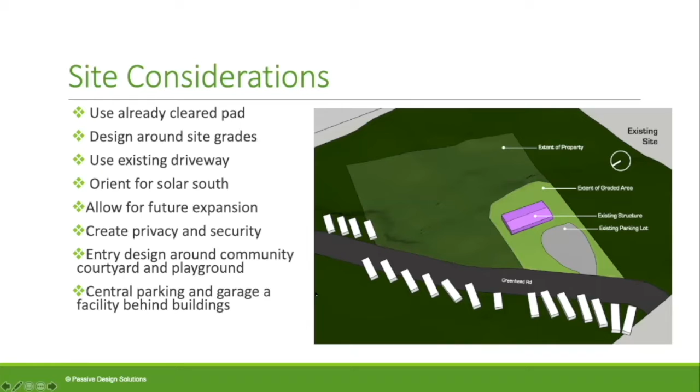We want to make it cheap to build, and we started that really early in the process. We had a really cooperative structural engineer who really gets what we're working to do. One of the things we did right off was reduce the frost wall, or stem wall as you'd call it in the States, from 8-inch thickness down to 6, reducing the concrete requirements for the walls by 25%, which also results in less embodied energy.

We designed the building with bearing on the roofs front to back so that we could eliminate the bearing under the demising walls between units. We were able to just use a ladder of steel within the slab itself, and expansion cuts, without having to put another frost wall under these demising walls. This gives us less thermal bridging, again, less concrete and less cost.

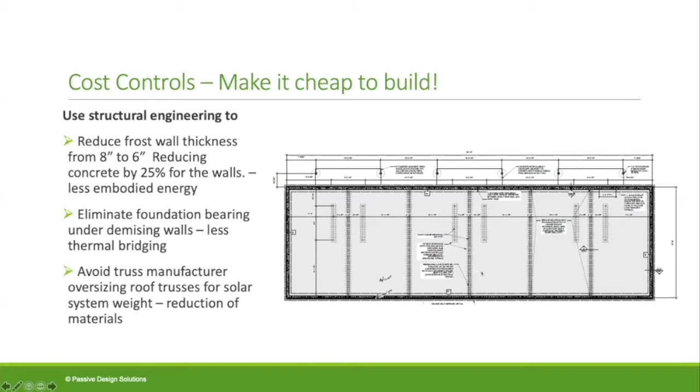I don't know what everybody else is experiencing, but we're finding that truss manufacturers, if they do the engineering on a project that says engineer the trusses for a solar system, completely oversize the roof trusses, which adds to the cost of the truss package. So we had our structural engineer do that sizing to avoid that tendency of the manufacturers to just oversize everything.

I mentioned we designed the roof front to back using a gable, so we're reducing siding quantities compared to using shed roofs. We are using a valley set to create this perpendicular gable, and this is actually south, so the gable roof works well for our orientation for solar panels. It's designed that they're going to construct the roof structure on the ground and crane it into place to help control the cost and make it a little faster.

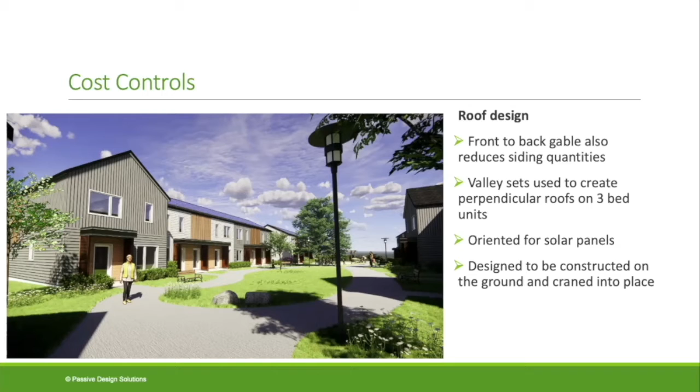From an assembly perspective, it's really important that we're using locally available materials that are easy to access and familiar to the trades, to control costs and keep things moving quickly on the construction side. Our roof assembly is very simple, just stick frame roof trusses with blown-in cellulose, manufactured about 100 kilometers from the site.

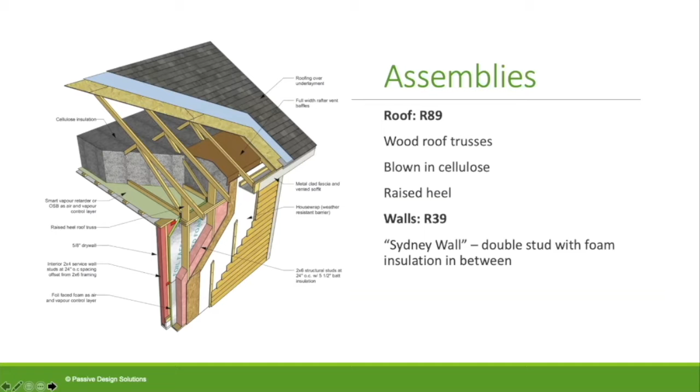We use a raised heel to prevent thermal bridging at the corner, and we're using a double stud wall with foam insulation in between. I call it the Sydney wall because we started using this in response to a project we built in Sydney, where you can still buy an existing home for under $100,000. We had to find ways to cut costs, so the truss wall got traded in for the double stud wall.

The frost wall has all the insulation on the inside, which eliminates the need for parging or metal flashing for insulation covering on the outside. We engineered that wall thickness down to 6 inches, and we have a frost wall only on the perimeter of the building, not across all the demising walls.

The slab is pretty simple. We have 2 layers of type 2 EPS for our R-value of 21. Again, we put our reinforcing in the slab rather than a thickened edge or a frost wall under the stair bearing and demising walls. By running the roofs front to back on the frost walls and only carrying the floor loads on the demising walls, that kept the load small enough to not require anything but a ladder of structural steel in the slab.

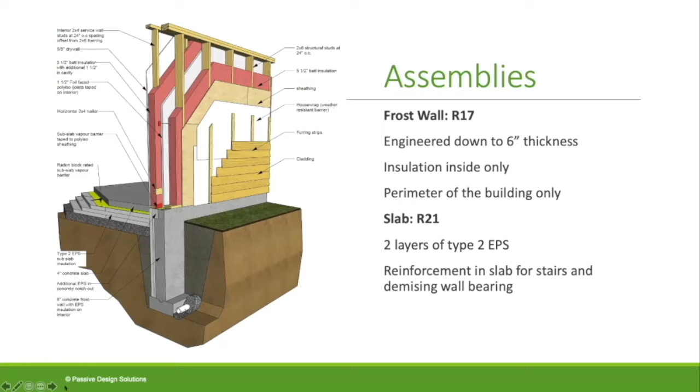On energy efficiency, because they are larger buildings, we can thin out the assemblies from what we see in single family homes. We use sensitivity testing during energy modeling to optimize the balance of insulation levels with the cost of solar panels, and we've designed simple airtight details to achieve airtightness without extra site detailing. We have shared hot water heat pumps between 2 one-bedroom units to keep capital costs down.

We've designed the windows to be installed in the weather-resistant barrier plane rather than halfway through the wall. I know there's a small energy penalty to doing so, but it allows us to install them in a method that the trades are super familiar with, with no extra flashing and drain sill pans required. We're using a vinyl passive house rated window from Kohltech, also manufactured about 100 kilometers from the site.

They also stepped up with a significant upgrade to the window package, as well as a cash donation to the organization to help make this project viable from the financial side. Heat pumps were cut from the budget, and we ended up using the energy model to optimize the design to reduce cooling loads, because there is no cooling in the buildings.

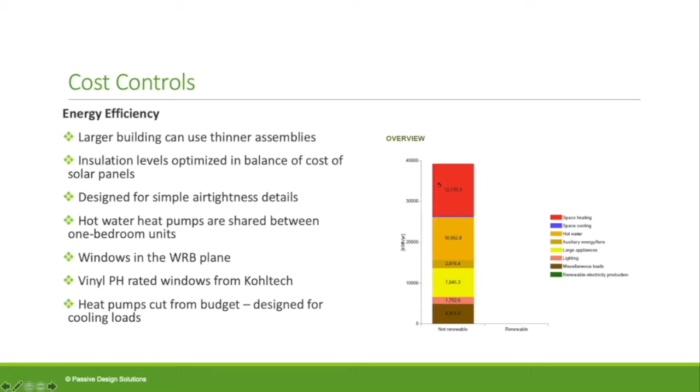We could have made a big impact by using heat pumps here in the energy model, but the discussion was really interesting. We really didn't have the funds in the budget to use a ducted heat pump system, and often we'll use electric baseboards with a single ductless mini split. There was a lot of discussion with the project team that the likelihood of these clients using a heat pump when they could just turn the knob on the electric baseboards was a risk.

Even though the model says we could do really well with heat pumps, there was a real question whether the clients would actually use the heat pumps or just heat their units with the electric baseboards, losing that COP on the performance. It's possible, we know from other projects, that tenants who aren't paying the energy bills themselves can use more cooling than necessary in the summertime, leave the windows open and run the air conditioning at the same time. The occupants in these units, many of them are living on the street.

So the idea of having to have ongoing training and user calls on how to operate the system, combined with high turnover in occupancy, was identified as a risk in going with a more complicated heating and cooling system. It was felt that tenants would default to the simplest way to maintain comfort. These folks are not your custom home energy geeks.

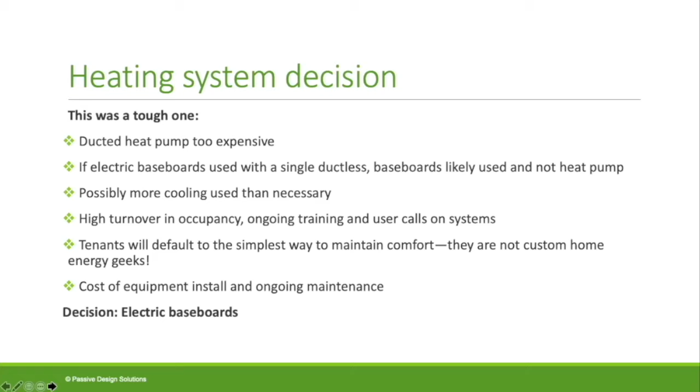We're considering roughing in the disconnect for electrical so that a heat pump could be added in the future if the climate continues to heat up.

So a few strategies to speed up the construction that really helped our construction schedule in meeting that March 31st, 2022 deadline that was attached to the funding.

The design team was extremely decisive. We went from start to final con docs in 6 months, and we started pricing in about 4.5 months.

We were very fortunate that the city had buy-in to this project right from the beginning, and we had unheard of turnaround times on inquiries and permit approvals. They rezoned the lot in 2 days, which is just unheard of for most municipalities.

We have panelization, so the walls can be built while the groundwork is underway. Even though the design wasn't done, the builder was involved in all the design meetings and pricing options very early, so we were kept on track from a cost perspective during the design.

Again, using that simple building shape and details is good for energy efficiency, but it's also good for controlling cost and the speed of construction.

All locally available materials that we can buy at any building supply place. The only exception probably being the HRV. We did use the most efficient Canadian HRV that's available on the market. We did not use a German-made HRV, again, for cost.

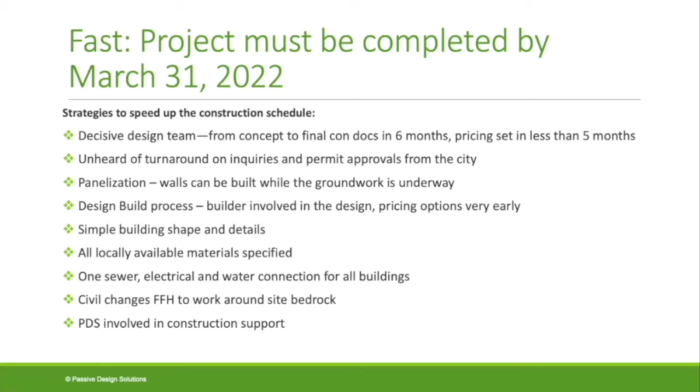So I think the key elements in thinking about the project of what made it fast, cheap to get to passive house and net zero was there was a highly collaborative project team, really no ego in that project team. I think it's the first time there's 11 people on the design project team.

I think it's the first time ever for me that the majority were women. Of the 11, 8 were women on the project team.

We found ourselves some smart structural, civil, and electrical engineers that really bought into our energy goals on the project, and the cost goals as well, keeping things simple. Again, reiterating that simple building shape is more energy efficient, more cost effective, and quicker to build.

Bringing our experience on affordable passive house projects to the team, I think, was really valuable in limiting those design options really early on. So instead of going down the road and then realizing that this thing wouldn't meet the energy goals or wouldn't meet the cost goals, it was a big help in getting the design finished quickly.

We used the energy model very early on to inform our strategies and to test the sensitivity of where we should stop with our passive house strategies and invest in solar panels as a more cost-effective option.

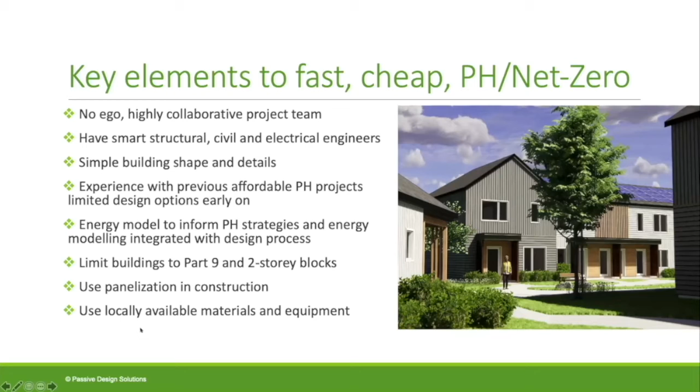So we broke the 37,000 square feet into 6,000 square foot buildings that will allow us to stay in Part 9 of the building code. We're using panelization, as I mentioned, and locally available materials and equipment.

So that is the end of my presentation. I have no idea how I did on time tonight, but there you have it. And I will leave it there for questions.

That was fantastic. Thanks, it was as good as I was hoping it would be. Sean, take it away with questions.

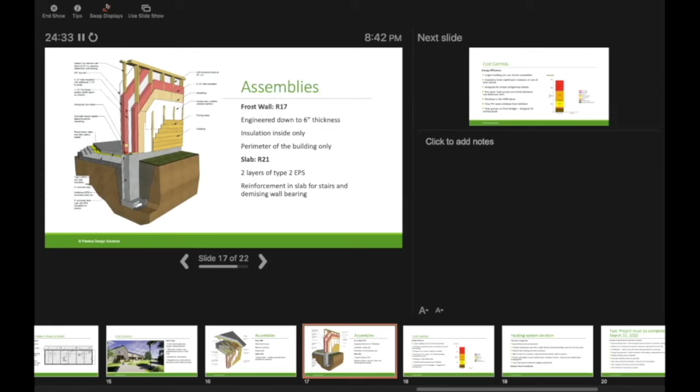Yeah, that's probably as good a one as any. Could you enlarge it, please? I don't think I can. Or put it in presenter mode or something? I have it full screen on my... Oh, I see, you need to just swap displays because we're seeing your notes. Are you seeing this? Yeah, but we're seeing your notes and all the other slides there. Okay, on the top it says swap displays, it should work. Okay, thank you, sorry about that. Okay, go, that's the right one. Great, apologies.

Thank you. Yeah, there is. Doesn't the foam board in between the cellulose impair the cellulose drying or the hydrothermal process in there?

Yeah, and we were really fortunate, we got some funding from NRC, the National Research Council, to do some building science studies on assemblies. So we spent a lot of time testing a variety of assemblies in 6 different climates in Canada. What was really interesting is a wall that works perfectly in Edmonton, Alberta, fails in St. John's, Newfoundland, and vice versa. So my first point about wall types is they need to work in your specific climate, and I'd caution against just moving different assemblies across climates without really checking it.

So your question about drying, there's this, I guess for me, a building science rule of thumb: in these thick walls we always have multiple vapor control layers. What I usually talk about is what is the strongest vapor control layer, and making sure you've got drying in both directions. The foil faced foam is a stronger vapor control layer than the plywood on the outside. We are using plywood rather than OSB with the assumption that it's more vapor open when it's wet, so if there is moisture, there's more chance for drying.